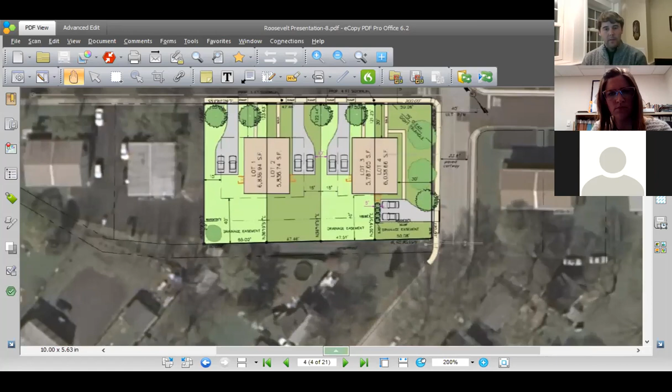This is a color layout of the proposed site plan. You have the 2 sets of twins. The front door faces North Girard Terrace. 3 of the 4 driveways will be on North Girard Terrace, and there will be 1 driveway on Roosevelt, which is where the existing driveway is for the single family home.

All the homes will have public water and public sewer. They're all approximately 3-bedroom, 2.5 bath with a front porch.

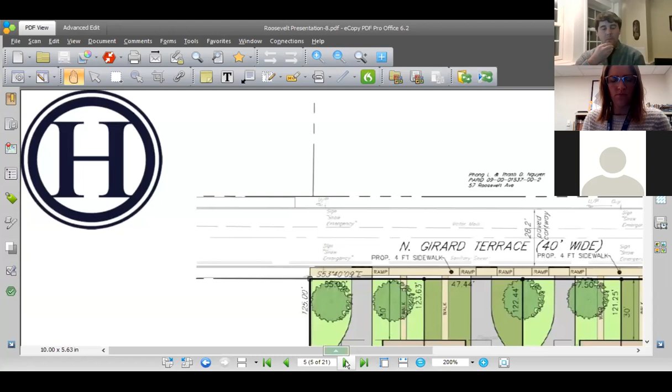Here's a larger version showing the proposed landscaping and buffering. Landscaping came up at the planning commission meeting, with some concerns about tree locations as far as sight distance and interfering with utilities. It sounded like the planning commission was open to possibly relocating some of the trees in the rear yard, which we're open to. My engineer and the borough engineer are going to put that together and come up with a game plan there.

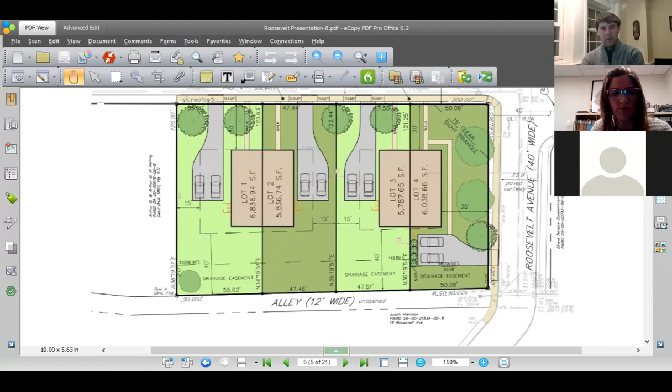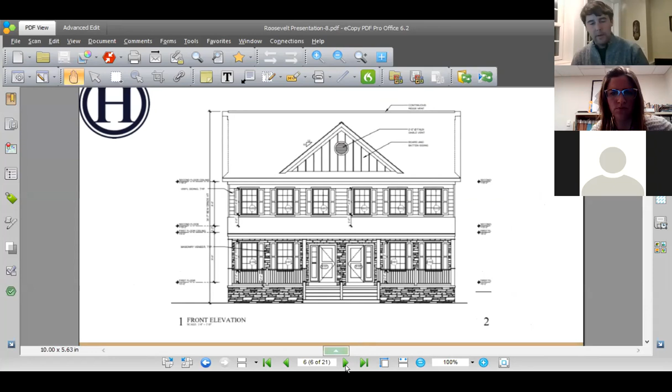These are some of the front elevations, just to give you an idea of what it could look like. That's more or less what we're thinking, but we're still in the planning stages of that.

These are the actual subdivision plans, which you may have seen. We received a second review letter that we're working through.

There doesn't seem to be any major issues. We're working through them, and we plan on making a resubmission in the next few weeks based on the Planning Commission comments and any potential comments you may have this evening. So that's the quick presentation, and we're happy to answer any questions you may have.

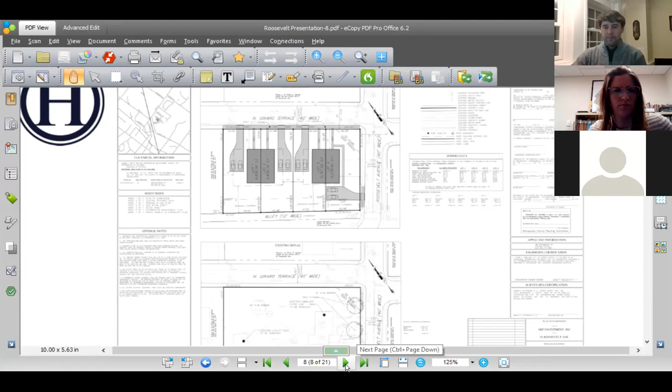We want comments from Planning Commission, either Mr. DeFinis, Mr. Stevens, or Mr. Cresser, before council gets into it. John, I was absent for the meeting. I was out working. Yeah, I guess you were. That's right. Go ahead, Larry.

Larry: I was just going to mention, as was said, there was some discussion on relocating some of the street trees. It seems like a lot of the concerns from our consultants' letters have already been addressed or will be addressed. So the plan's looking good.

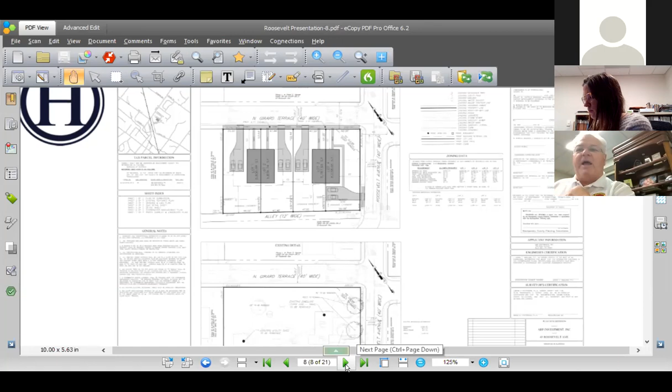And just to follow on that, the borough engineer is on Zoom tonight if you have any questions. As Larry just stated, from the time we received the plans and review letters that had been done by Bursich and McMahon, and the utility engineers and the code officer, some things have already been addressed in the submission you're looking at right now.

Chad confirmed: based on the rendering illustrated at the Planning Commission meeting and tonight, it appears that our concerns have already been addressed. Certainly, they will need to be included in the next submission package, but from what we see, it appears they will be addressed. Following the comments from the applicant and his attorney and engineer, they will comply to the letter with all of the comments from the borough engineers and the zoning officer.

The issue of the trees was raised for sight lines in the front yard, as well as disturbing utilities. We're going to put underground utilities, water, sewer, electric to these properties, and we're going to put trees on top of them.

It's not - I know we have street trees as part of our ordinance that we require them, but it might be in our best interest to have yard trees instead, so that we don't cause a sight line obstruction, and so roots don't grow into the underground utilities, which is a constant battle here in this municipality. That was one of the comments we had on Monday night, and the Planning Commission was open to that discussion.

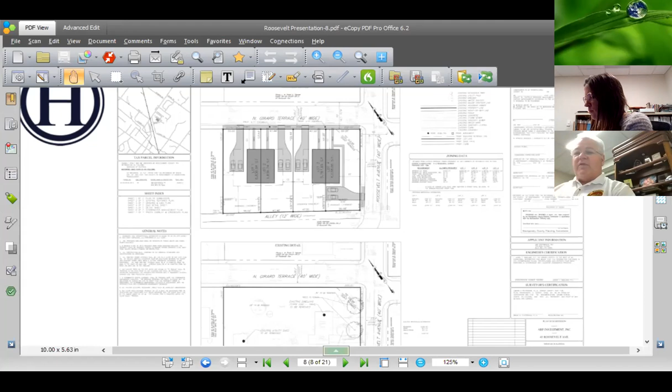The two engineers will review that on the next plan. The Planning Commission did recommend preliminary approval of the plan with those changes that the applicant has conveyed they would comply with.

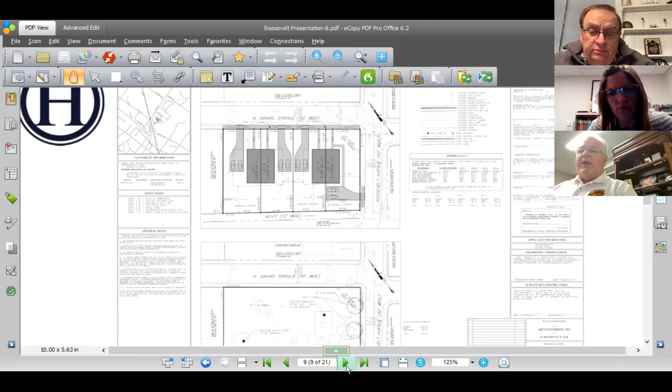The Planning Commission also recommends approval of the 3 requested waivers. One of the things we are waiting for is the letter from the Montgomery County Planning Commission. We have not received that yet.

Those 3 waivers you're addressing are on Lenape Valley Engineering's request - actually, February 1st. We eliminated one of the waivers, but ended up adding another one from that letter.

So it's on the screen right now, you can see it. There was a waiver related to the clear sight triangles for the new driveways because of the street trees. There's also a stormwater management waiver related to the fact that we did our infiltration testing and didn't get positive infiltration results. So we're providing a stormwater design that detains water much more than the ordinance requires, but it doesn't provide for infiltration because we can't make that work.

The last waiver is related to setbacks in the borough. Building setback lines are based off property lines unless there's an easement. In the back of these properties, we have stormwater management facilities with an easement over them for maintenance and access. Technically, we'd have to take our building setback line from that easement line, but in this case it doesn't really make sense - they'll be subsurface and there's plenty of yard area. So we had to request the waiver, and the Planning Commission reviewed those and were comfortable with the requests.

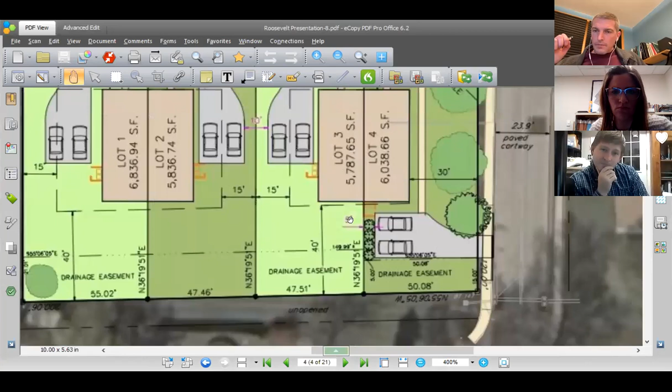So if I can make out here, it has like 10 feet between the parking spaces on the 2 middle lots. So that's the 5 and 5, right? Yeah, that's it. If we zoom in there, there's like a little red line now, exactly. So 10 feet centered on that property line that wasn't there before. Exactly, originally it was roughly 2 feet between the parking area and the property lines.

And then if you look at lot 4, what I call head-in parking off of Roosevelt, they originally had 1 foot off the property line. My concern was headlights shining into the rear yards of the other lots, and exhaust if a car were to back in. They followed my suggestion and put some landscaping there and added that 5 feet buffer. So they're going to finalize what that landscaping is going to be, either shrubs or arborvitaes, from what I understand, and that would effectively address my concern.

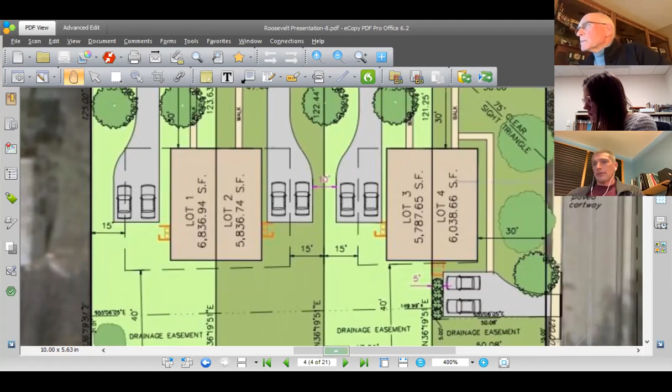So the 2 parking spaces meet the requirements for this type of construction. Do we have street parking where the driveways are? I believe North Grand is open for street parking. It is designated an emergency lane. For some reason it's a dead-end road, so I'm not sure why it is, but it is. I believe your traffic engineer's letter recommends no parking, and I forget, he provided a distance in his letter to the intersection. 50 feet.

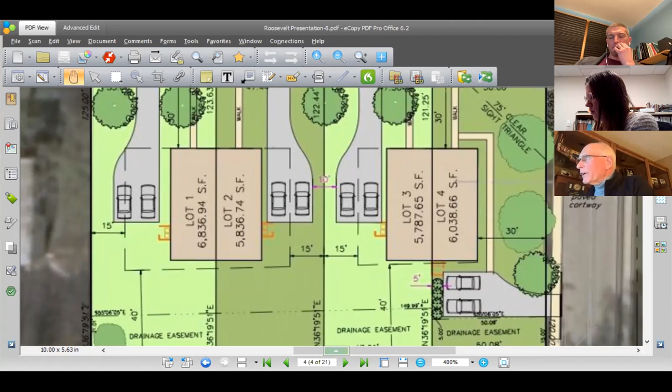Is this North Grand or is it North Grand Terrace? North Grand Terrace. So the homes, it's not a direct line intersection, but on the other side of Roosevelt, that's just Grand? The south one, that's Grand Terrace. South Grand? Correct, Grand Terrace. They're all known as Terrace though? Yes. Okay, just wanted to be clear, thanks.

So Planning Commission, no major points other than the street trees, I hear. No. Council, anything else?

Art, if I may, the homes you're suggesting, have you built anything like these previously? I think he said, have I built anything like these previously? Yes, we have, a number of times in different municipalities, most recently Whitpain Township, Ambler area. Twins such as this? Yes. Okay.

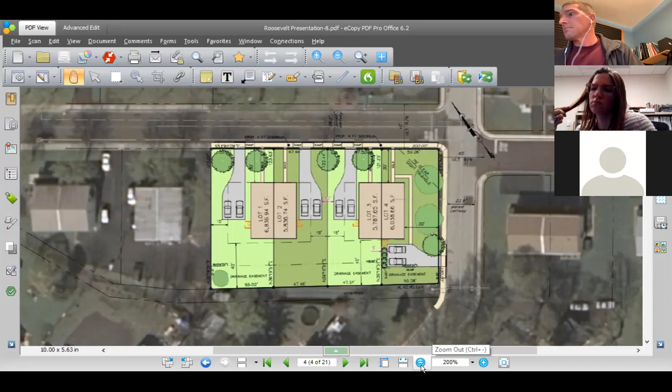As long as we get Montgomery County's report back in time to take a look at, right? Okay, so just for planning purposes, Art and Kim, the borough's regular meeting is coming up on February 17th, 2021. And if we put you on the agenda, hopefully we'll have everything in line for the council to take action that night. That would be great. Okay.

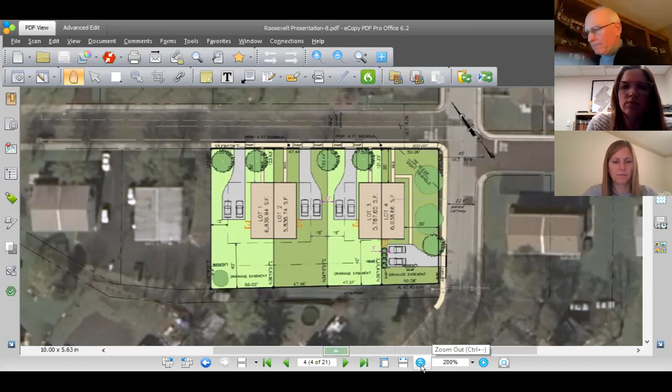Moving on the agenda, next item, the reports from our committee chairs and mayor. Anyone wishing to, that has information to share with council?

Public safety, police report. I got to remember to put tags on this so I can turn to it easier. Here we go, found it.

Not too much exciting news other than the usual DUI and public drunkenness. People just can't seem to control themselves once they're in that state, right? True. Although I guess they submitted to a blood test right there.

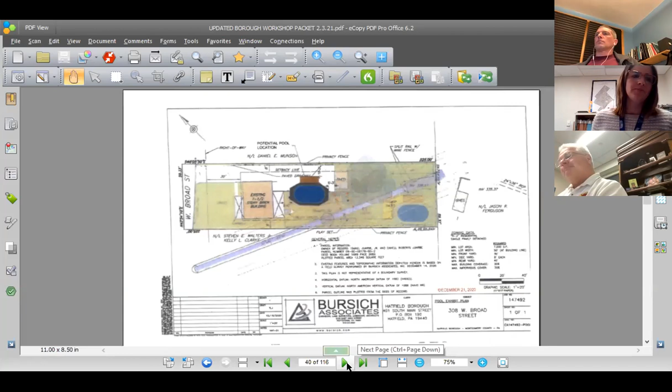You mentioned Lindsay's HERC update, and she asked about the location because East Lincoln might be under work with the bridge. Yes, so proposing possibly Talmenson Avenue and Heritage Park. If we want to think about that, or other locations you might suggest.

Can we use over by the SEPTA lot, that area? Can't put cars on Market Street. If we could use the lot, I guess, but I think they're looking to have vehicles on the street itself, like they did on Lincoln. Yeah, so they can close the street.

Is there another lot around besides Talmenson Avenue? It's the street that they're looking to use, not necessarily the lot - to pull the cars on the street, have them come in, park one way, and then exit another way. So if we have them come in off of West Broad Street, a 40-foot road, park heading out towards Main Street on Talmenson Avenue, then getting them to leave would be easier, rather than - we're not going to be able to use Lincoln Avenue because the bridge is out.